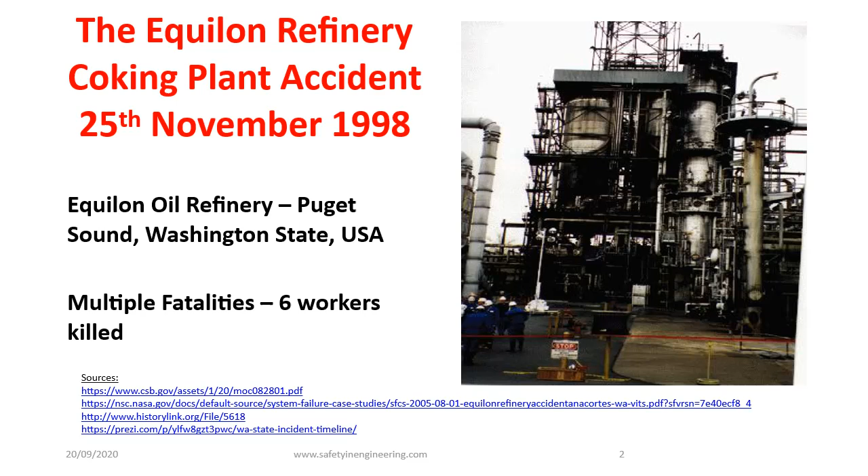But if anyone knows the whereabouts of the Washington State report, please let me know.

The events leading up to the accident were that there was a storm in the early morning of Tuesday, November 24th, 1998, which caused a power outage and a complete shutdown of the refinery. That was partway through a charge cycle in drum A in the coking plant, which left about 200 cubic meters of hot coke and hydrocarbons trapped in the drum.

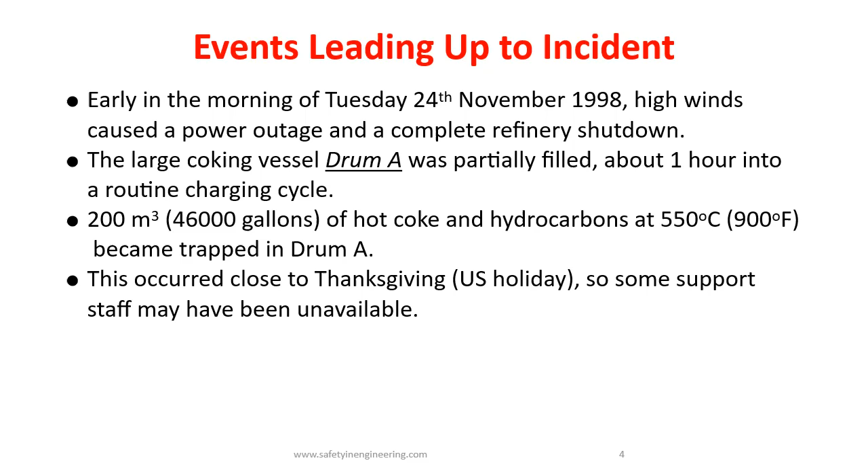And this occurred close to the Thanksgiving US holiday, so it's possible we should bear in mind that lack of support staff may have been significant in this, although as we'll see, that's by no means certain.

I know you'll all be very familiar with the coke production process - this slide just tries to summarise it. Heavy oil into the coke drum, and cracking occurs to reduce the oil to coke and hydrocarbons, which go off for further processing.

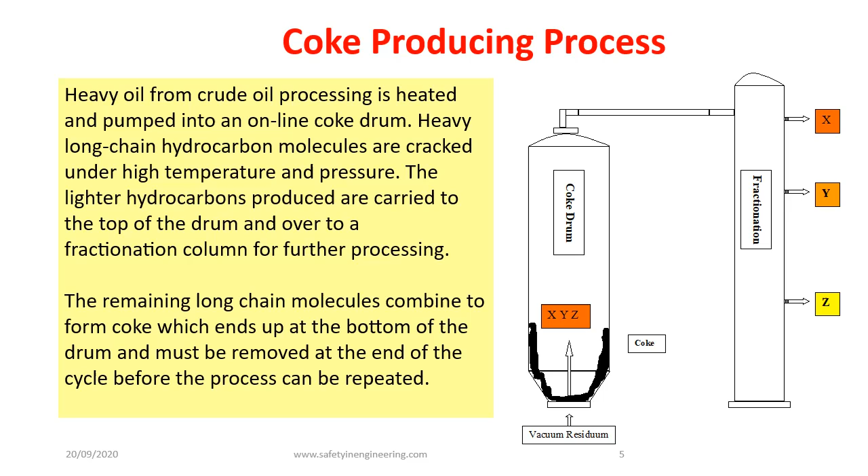So coke production is obviously a batch process, and at the end of each batch the drum is cooled first with steam and water, and then once temperatures are low enough, work permits are issued and coke cutting is carried out. After unheading the drum, high pressure water is used to cut up the coke, and it's then drained out the bottom of the drum into a pit below.

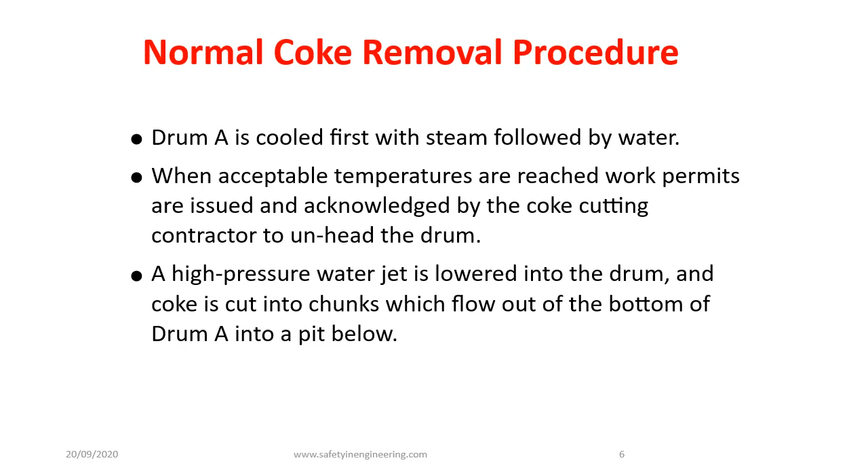So this shows the situation after the power failure. A part-filled drum, and the charge line was clogged with coke and heavy oil, and that had to be cleared before they could make any progress. They couldn't get any steam in because of that blocked charge line, and that was a problem.

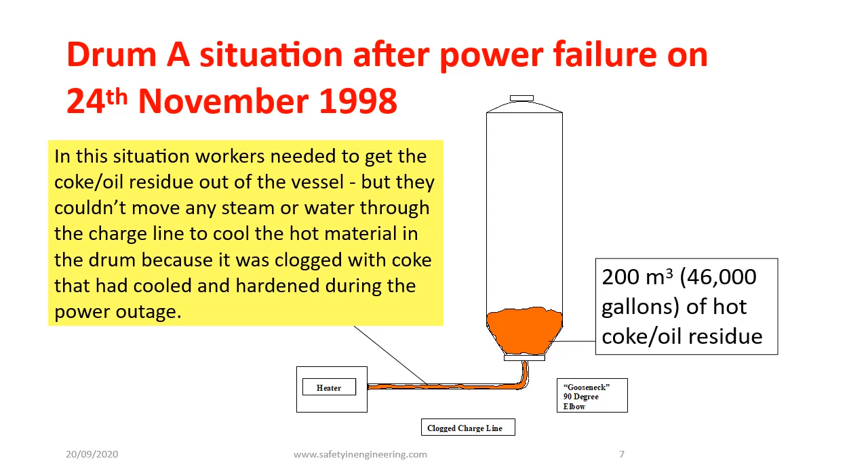Power and steam were restored after the grid failure about 10 AM in the morning, and the operators thought they'd got steam into the drum. However, it's likely that instead pressure relief valves were lifting and simply diverting steam into the blowdown system, so it's unlikely any steam actually got into the drum. This caused problems, as we'll see.

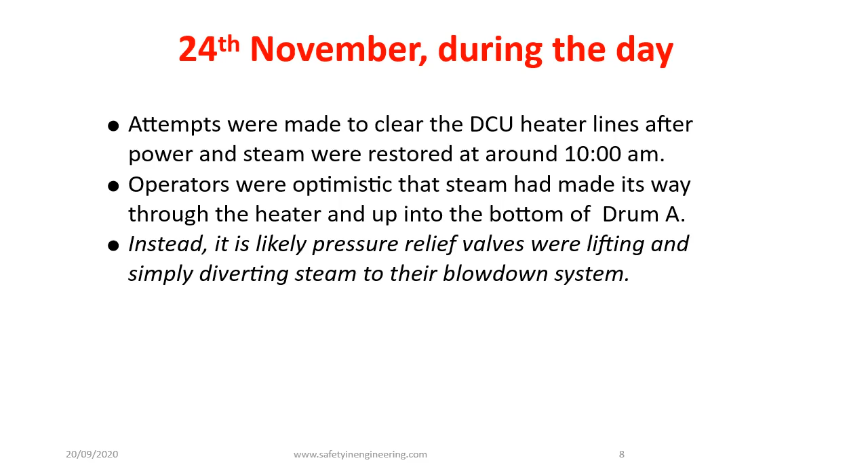Overnight, the night shift were told just to leave it alone. The drum was cooling without water, and day shift would unhead it on the Wednesday morning. On the Wednesday morning, there were some impromptu meetings held to discuss what to do next, and initial attempts were made to clear the line into the drum without success.

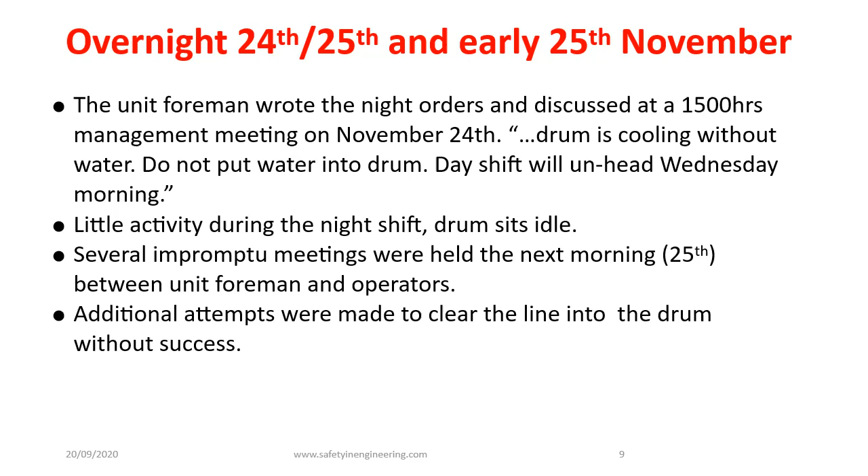Conditions inside the drum were essentially unknown. The only temperature indications they had were nowhere near the bulk of the hot coke. Later estimates said it would have taken 200 days for the residue to cool down to a safe temperature.

Anyway, in the afternoon of the 25th, the top head of the drum was removed without incident, and preparations were then made for removing the bottom head.

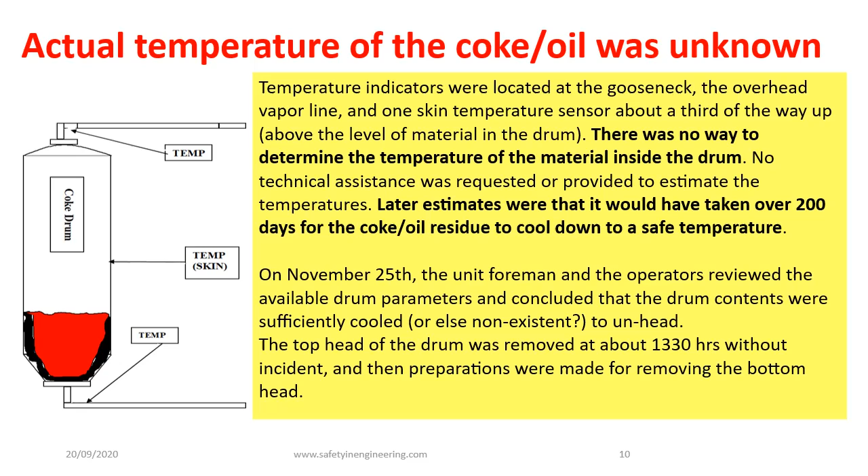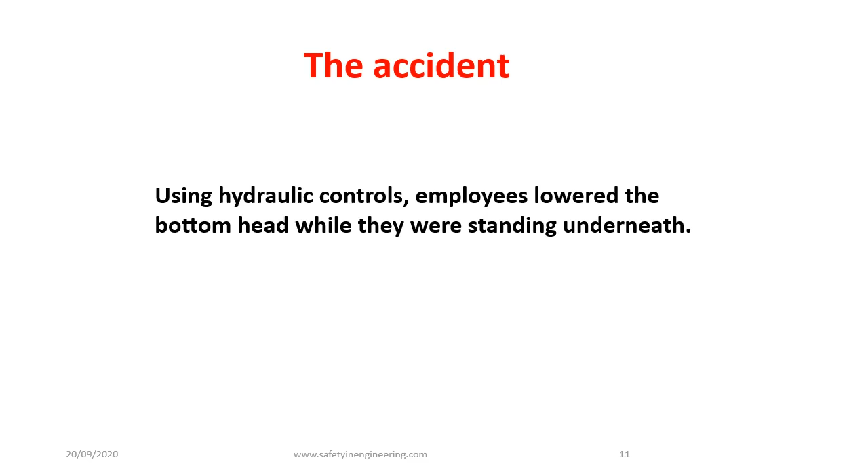So in the afternoon of the 25th, using hydraulic controls, employees lowered the bottom head while 6 employees were standing directly underneath. It's slightly hard to believe this happened. We're in the situation that a drum containing 200 cubic meters of hot coke and oil had its bottom removed while 6 people stood directly underneath. It's a bizarre accident, and what I want to do is talk about how this could have happened.

So how could this horrific and bizarre accident have happened? If we try to see it from the plant foreman's perspective, there has to be an element of guesswork, of conjecture, but unfortunately the foreman was killed, so we can't do it any other way.

When the head was taken off the drum, he wouldn't have been able to see very much, I suspect. It'd be black on black with poor visibility, so he wouldn't have been able to see the oil level at all, especially since it was so close to the bottom of the drum. Furthermore, he had no indication of high temperature in the drum. The only instrument on the drum was above the oil level, and the other instruments were on pipework outside the drum. So the only indication he had of temperature was that it was reasonably low.

He thought steam had passed into the drum, although it had probably gone to blowdown. So there seem to be 2 options. Either he thought cooling had been achieved because of the steam, although that seems a bit far-fetched since it wasn't on for that long, or the second option, which seems more plausible to me, was that he concluded the drum was empty. There was no high temperature indication, and he couldn't see anything from the top.

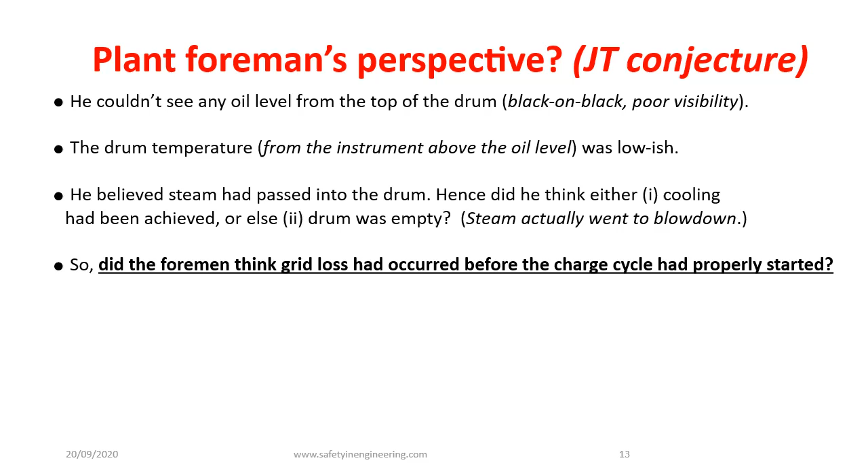So my guess is that the foreman thought the grid loss had occurred before the charge cycle had properly started, remembering that the grid loss happened on the night shift when he wouldn't have been there. Whatever was in the log, we haven't seen it. I haven't got any information about what was logged, but maybe the log was ambiguous. I think he believed the power loss had happened before the charge cycle properly started, and the drum was therefore empty.

One of the many uncertain aspects of this accident is the role of the night shift team. The power failure happened on night shift, early in the morning of the 24th of November. That night shift crew should have logged clearly that a lot of heavy oil had been transferred to drum A, and should have passed it on in the verbal handover as well.

If it was the same night shift team, i.e. if there wasn't a shift change on that day, then that same team had an opportunity the following night, on the morning of the 25th, to tell the day shift that drum A was full of heavy oil. So they got 2 bites at the cherry, as it were - 2 opportunities to tell day shift that drum A was full of oil. What was in the night shift log? I don't know. What was said in the handover? We'll never know.

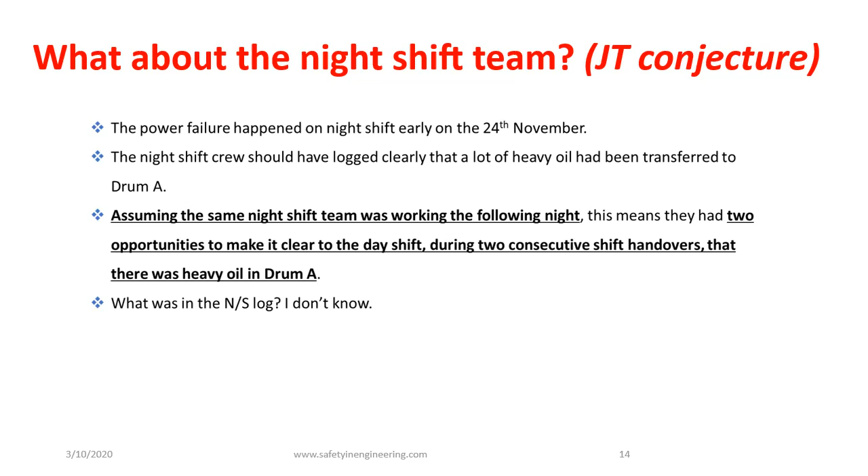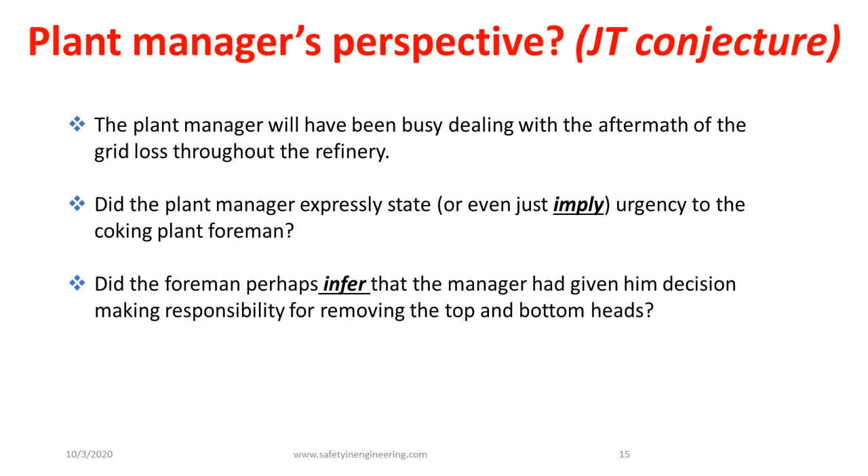From the plant manager's perspective, he would have been overwhelmed dealing with all sorts of things around the plant arising from the grid failure. So maybe he implied urgency to the foreman - just get on with it. And maybe the foreman inferred that the manager had given him responsibility for getting on with it and didn't have to refer back to the manager.

The outcome then was that oil spewed out in all directions, burst through a crust, and was above auto-ignition temperature. It caught fire, and all 6 workers were killed. You can see the green dots are estimates of their location at the time. A very unpleasant accident indeed.

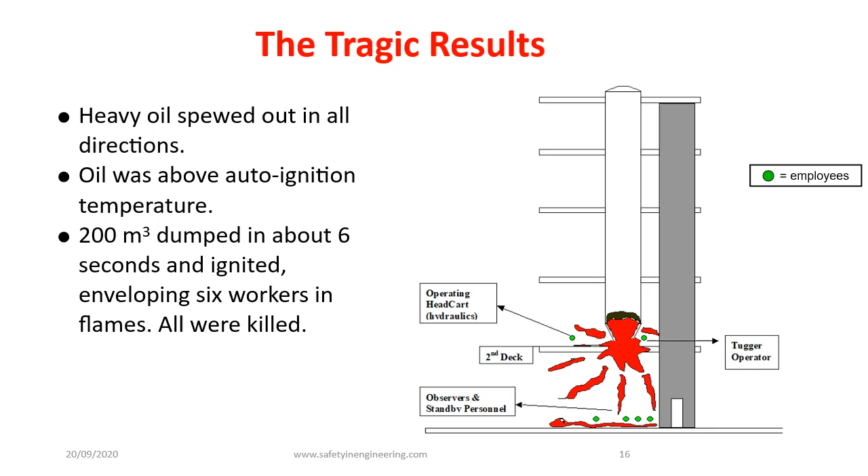I've no knowledge of how quick the deaths were of the 6 workers who were killed. I hope it was quick, but the cleanup process must have been traumatic for all involved. It's one of those accidents where I just don't ever want to go there. One of the worst jobs any plant manager ever has is phoning up family to tell them of an accident on plant. It's not something anybody ever wants to have to do.

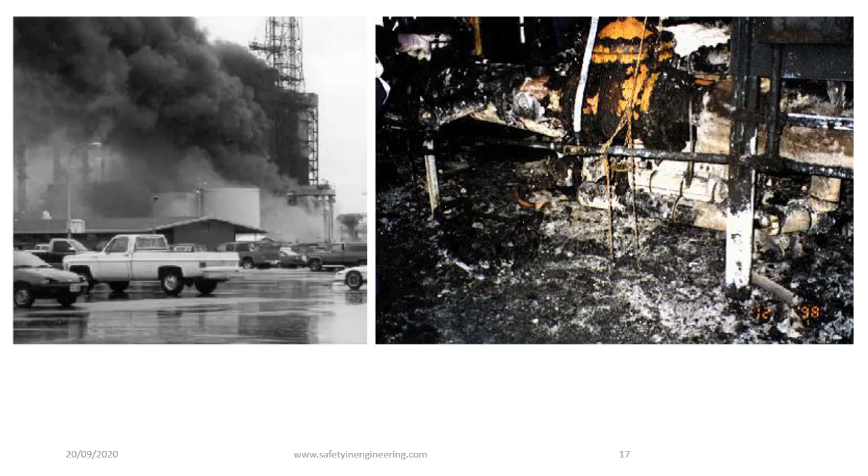So in the aftermath of the accident, the Washington State authorities set up an investigation that lasted 8 months. I haven't seen this report, but I've read that the root causes identified were: first, the plant manager's decision to allow cooling for only 37 hours; second, failure to train employees properly; and third, inadequate management of change procedures.

Equilon subsequently installed a remotely controlled system for removing the drum lids, and installed a gas-fired backup system to maintain steam supplies in the event of power failure. As I say, I've never seen the Washington State report, and if anyone can point me in the direction of a copy of it, please get in touch.

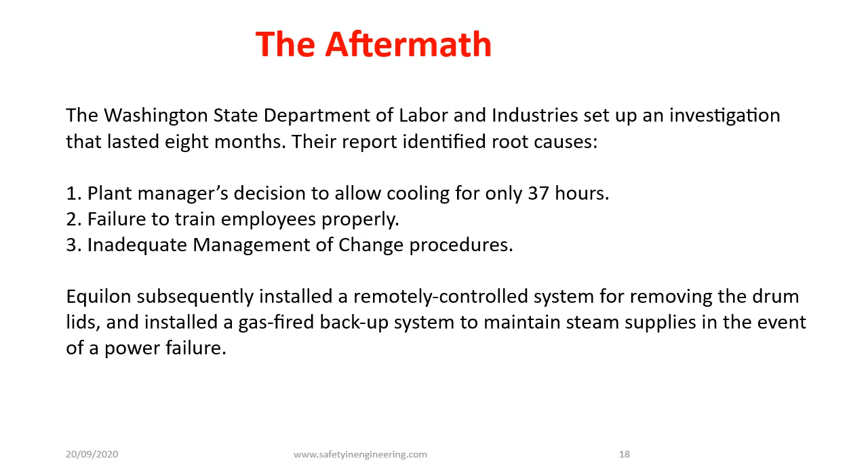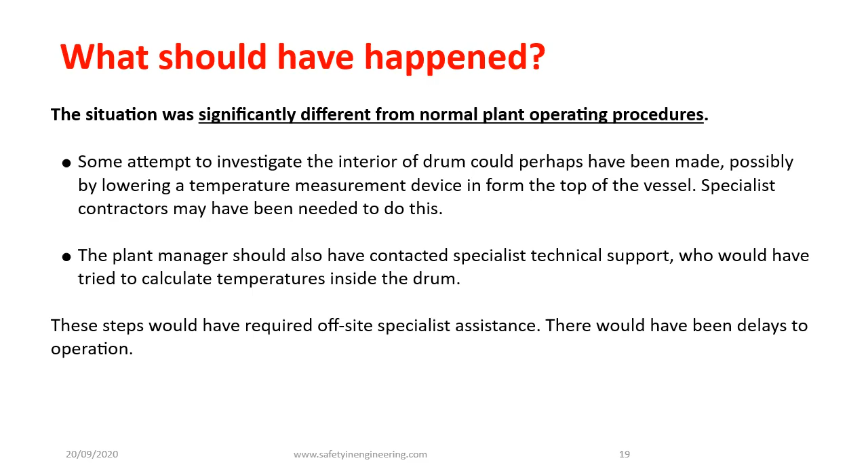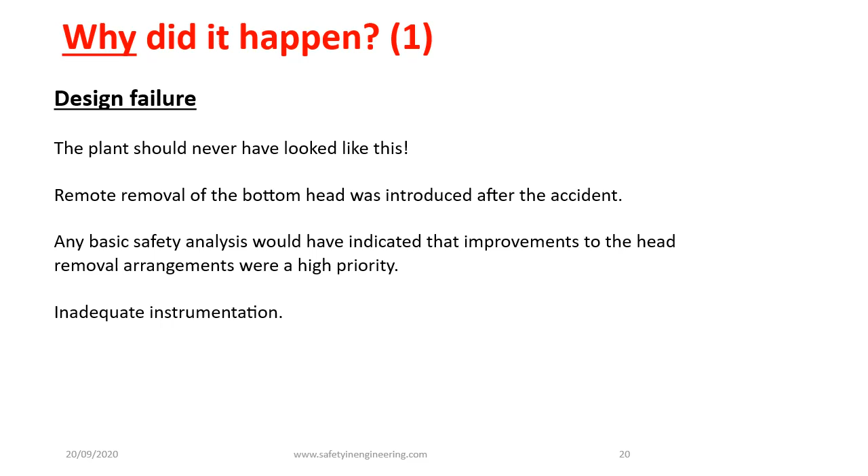And if you ask, why did this happen? Well, design failure is the first reason. The plant should never have looked like this. Remote removal of the bottom head was introduced after the accident, but any basic safety analysis would have shown that improvements to head removal arrangements were a high priority. And also, the instrumentation was clearly inadequate. There was no real proper idea of temperatures near the bottom of the drum.

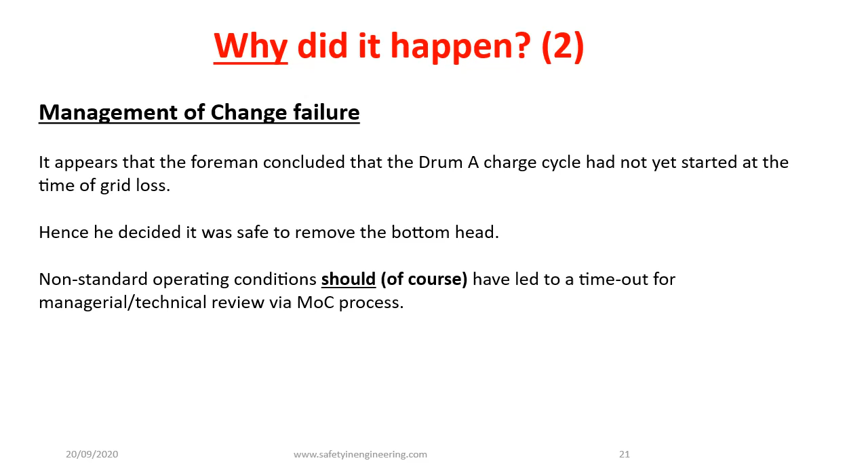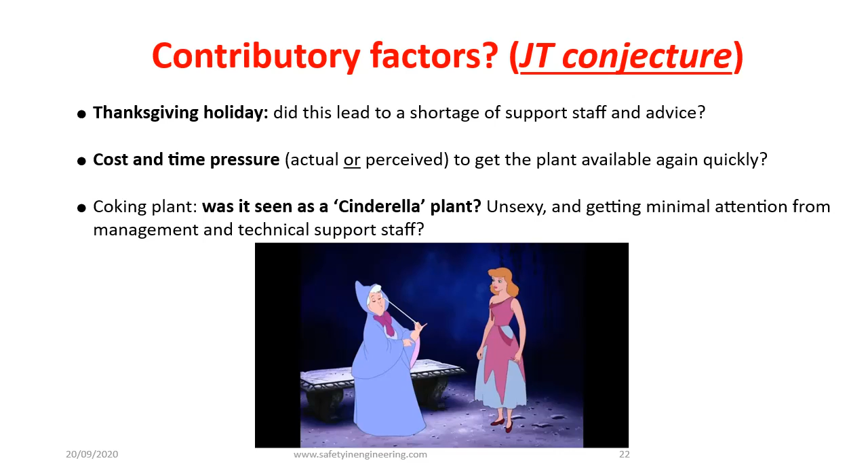Contributory factors could have included, well, the obvious one: Thanksgiving holiday, a shortage of support staff and advice. Secondly, cost and time pressure, actual or perceived. Did the foreman think he was being rushed to get on with this? And the last one: was the coking plant regarded as a Cinderella, unsexy, getting minimal attention from management and technical support staff? Did the coking plant guys just get on with it, and were they largely ignored?

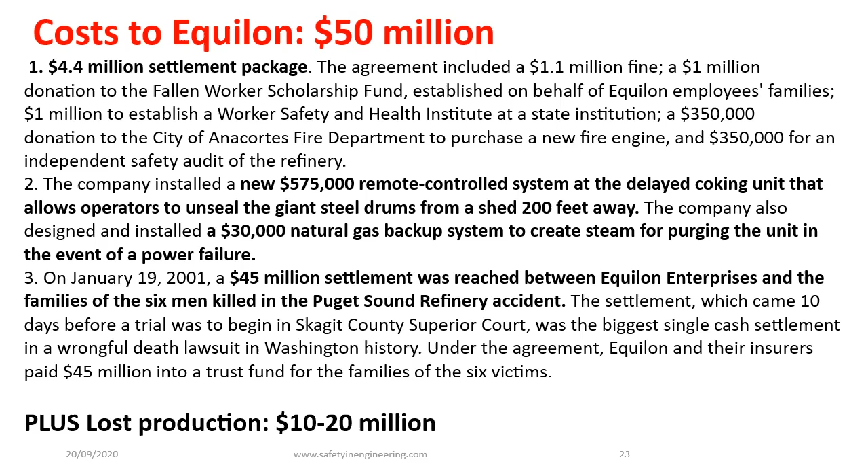Total costs to Equilon were about $50 million. This included a legal fee charge, settlement package, design improvements, and most significantly a $45 million settlement in a civil case brought by the families of the 6 dead men. So this was a very expensive accident for Equilon, quite rightly so.

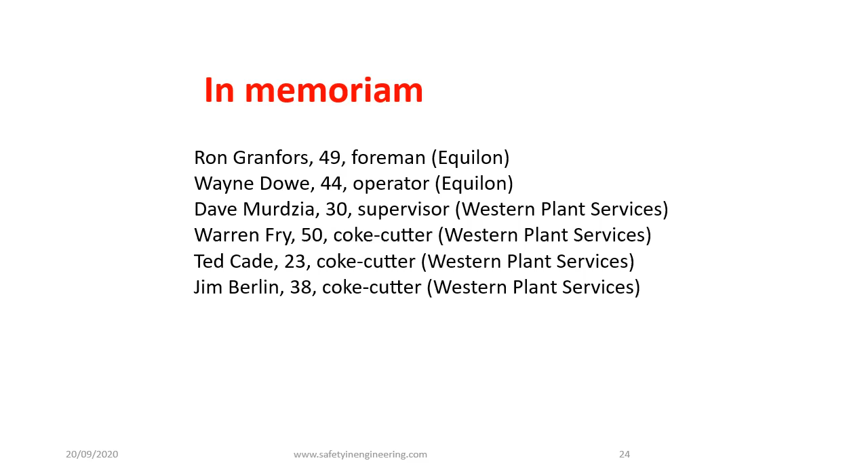Summary then. I guess all accidents tend to look bizarre with perfect hindsight, but this accident seems to me to be exceptionally bizarre, and we'll never know exactly why it happened because the foreman was killed.

It does feel like no modern standards safety analysis had been carried out on the plant as built, because the removal of the bottom head of the drum was clearly a safety critical process. The factors that are significant seem to be poor design, the lack of remote head removal equipment, weak management of change, especially following a power loss incident, which is an entirely design basis condition. There should have been procedures in place for how to deal with all the circumstances following a power loss.

And then the lesser factors that we don't really know about. Thanksgiving holiday - does it mean that there wasn't help available that might otherwise have been? Time pressure - did the foreman perceive that he was under pressure to crack on with this and get the plant running again? And then the last one, which is the most subtle one really: was the coking plant regarded as a relatively unimportant, low risk part of the plant that management did not pay adequate attention to, and perhaps technical staff didn't pay adequate attention to either?

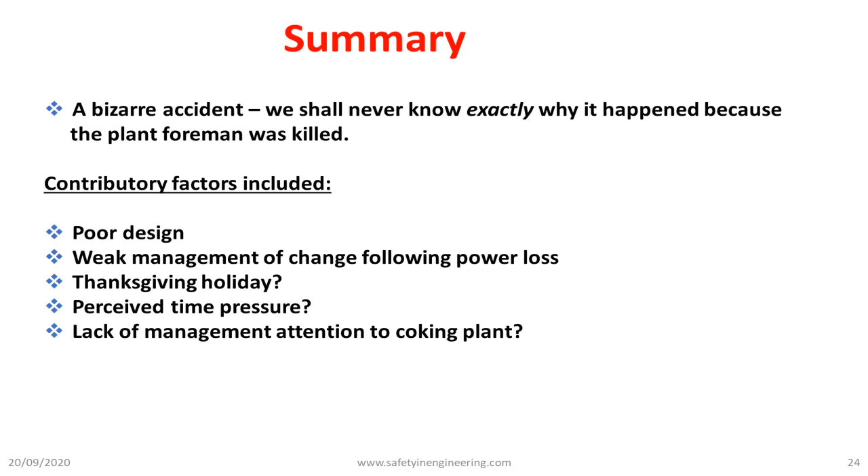The last three are ones that we'll never really know the answer to. However, there are press reports from the civil lawsuit which concluded in 2001 out of court. The lawyer for the families, it says here in the Seattle Times, 20th January 2001, a guy called David Benninger, introduced evidence that refinery supervisors were following a management philosophy that promoted fear as a motivational tool and encouraged workers' ongoing risk-taking in order to increase production.

How much weight you can put in this is, of course, open to question. Any lawyer in this sort of case is bound to say something like that. But it does sort of lend some strength to the argument that the coking plant at least was being neglected.

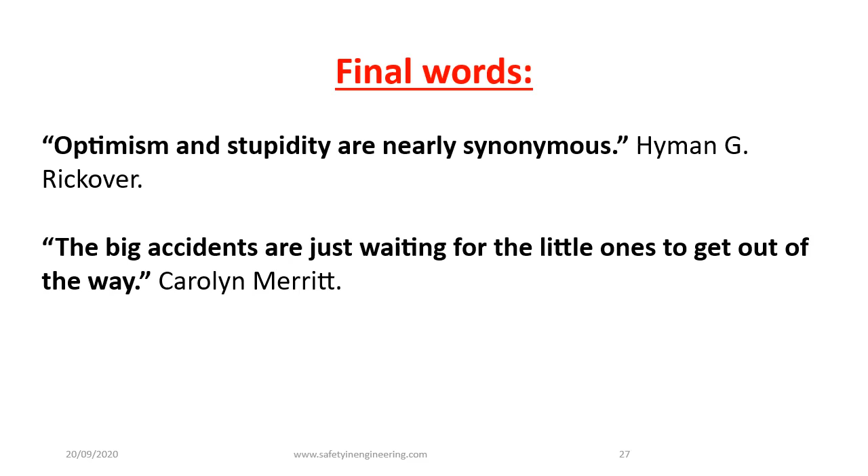This accident is really one of the most egregious, most exceptional accidents I think I've come across, and I think we're obliged to remind ourselves of these events, just how easy it is for people to come unstuck, to do things that appear daft, crazy, when abnormal plant conditions arise. Accidents are avoidable.